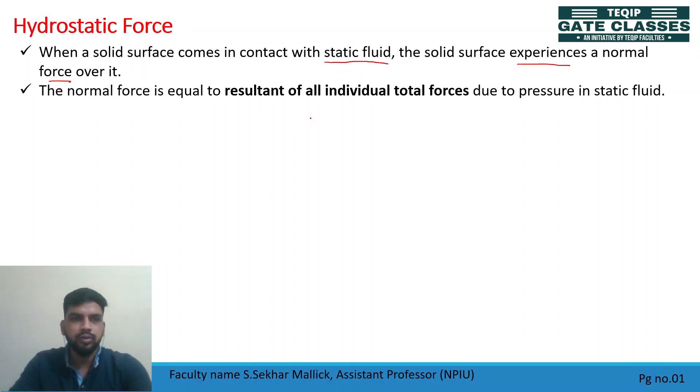This normal force is equal to the resultant of all individual total forces due to pressure in static fluid. This means whatever normal force acts in static fluid over the solid surface, that is equal to the resultant of all individual pressure forces. The total resultant of the pressure forces acting is your normal force, and that normal force we call as total pressure or hydrostatic force, right?

And the magnitude is equal to the resultant of all individual total force due to pressure. So now tell me, what is the location of hydrostatic force?

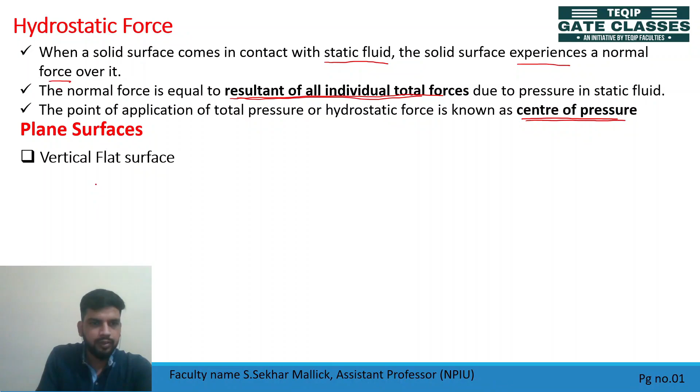Suppose here we have a flat surface that is vertical. This is just submerged in the fluid. This is your fluid surface, and let's take this total height as h, capital H.

And Cg of this vertical flat surface is here. Cg we denote by x bar. So x bar is the distance of Cg from the fluid surface. If I see this surface, this was the side view. For simplicity I am assuming this as a rectangular surface. This length, suppose this is your L.

Now let's consider a small elemental area of length dx. This small elemental length is dx. Then the area of this element will be dA equal to L into dx. Length is L and this height is dx, right?

Now tell me, what would be the pressure force acting on this element? How much pressure force will act? That pressure force dF, suppose small dF, will it be equal to pressure into small elemental area dA? And what is pressure here? Assume this small elemental area is at a distance x from the free surface. Then will it be equal to rho g into x?

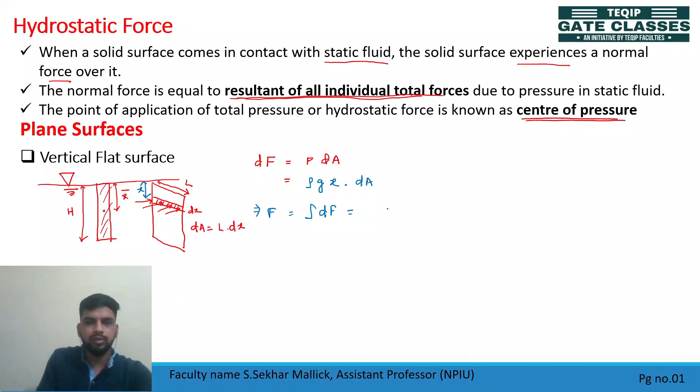So this is the force acting on a small element. If we want to get the total force, or the resultant of all individual forces, we have to integrate this. So total force F equal to integration of dF, isn't it? That is equal to integration of rho g x dA. Rho is constant for incompressible fluid and g is always constant, so can I take rho and g outside of this integration?

That leaves x into dA. What is integration of x into dA from mechanics? This is the first moment of area, isn't it? So integration of x into dA equals A into x bar. So in place of this, can I write A into x bar? So force, total pressure, or hydrostatic force becomes rho g A x bar. What is rho g?

Can I write rho g as omega or gamma? So rho g is also equal to omega, a, x bar. Some authors denote omega as gamma. So you can write that force equal to omega or gamma times a x bar. This is for a vertical flat surface.

Now tell me the location of this pressure force acting on this vertical surface. Weight acts at CG, and CG location is at x bar distance from the free surface. Now tell me, what is the location of this force? The location of center of pressure, we denote that as h bar.

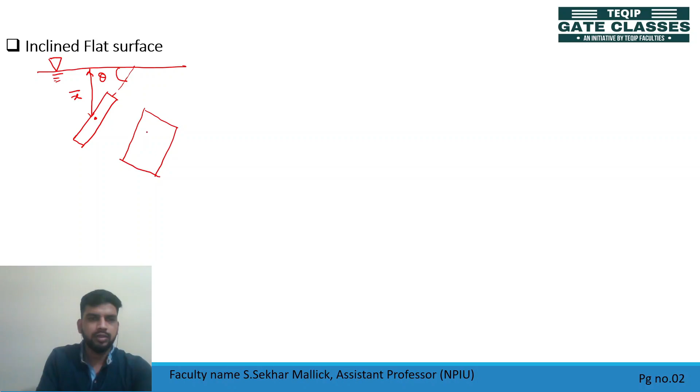Let's draw an inclined flat surface. Suppose this is your liquid free surface, and here you have a plate, a flat plate at an angle theta. Now let's assume this is the CG of the plate, and the distance between CG and free surface is x bar. Assume this plate as a rectangular surface, so its projection is this one: this length is L, this height is capital H.

Now tell me, force will be equal to how much? Total force, as we already discussed, will be equal to omega a x bar, but its center of pressure, the h bar value, will change. H bar will be equal to x bar plus Ig by a x bar, times sine square theta. So this h bar also depends on orientation - if the orientation changes, the value of h bar will change, isn't it?

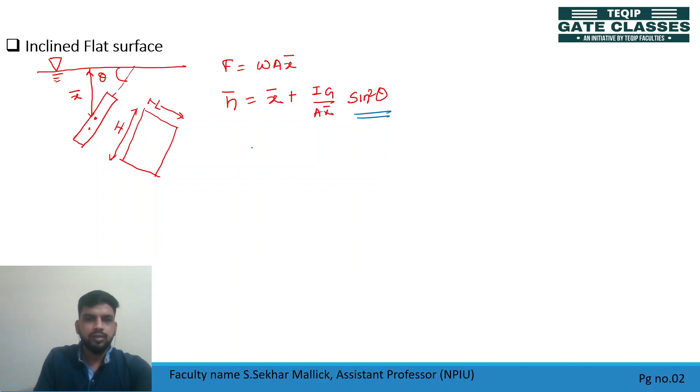Now, can you find this value for a horizontal surface? Suppose this is your horizontal surface, and the CG is at distance x bar from the free surface. Now tell me, what will be the value of total force, total pressure, or hydrostatic force? F equals omega a x bar. It will not depend on orientation.

Then h bar - tell me the location of center of pressure. For this case, can I write the angle theta as 0? If theta is 0, sine theta becomes sine 0, which is 0. So this term will be cancelled out, right? So h bar will become only x bar. H bar is only x bar, right? This is your pressure force acting on this horizontal plate.

So here pressure force will be small. Then with depth, there will definitely be an increase of pressure. So with depth, there will be increase of pressure.

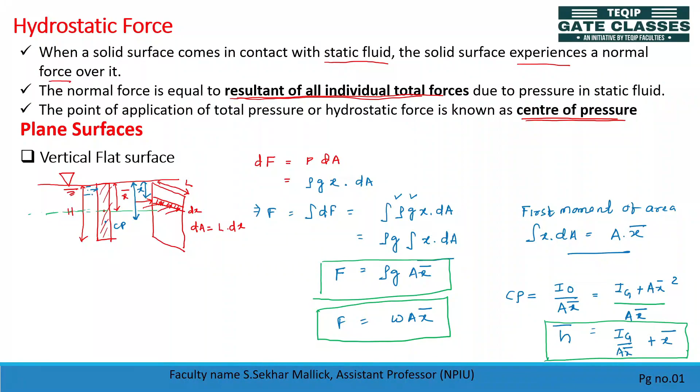Similar to the last figure, you can go and derive this. Here also, can I write that this pressure will be increasing with respect to depth? We know pressure increases with respect to depth. So it will come like this, like a triangle. So this pressure distribution is looking like a triangle.

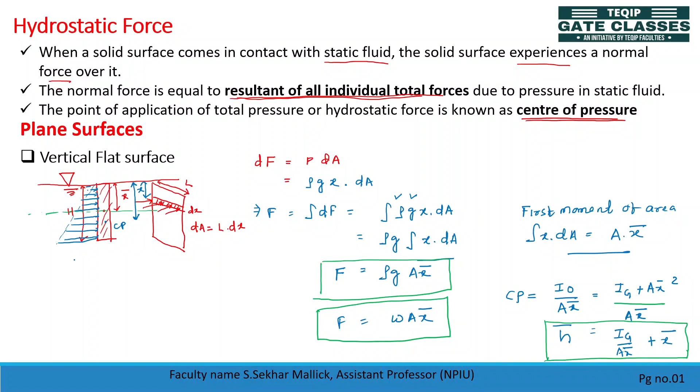And the center of pressure will be the centroid of this total area, right? Centroid of this total area is your center of pressure. So how much? If this is a triangle, you can find this value equals 2h by 3.

So this is for inclined flat surface and horizontal flat surface. Okay, now tell me one thing.

What is CG of this? CG of, suppose this is a triangle, and this is CG of the triangle, and this is your surface, bottom surface. If this is your y bar, what is y bar value? If I assume this height is h, what is y bar? Y bar equals h by 3.

Suppose if you have this semicircle, then for this semicircle, where will the CG be? CG will be at some distance. This is your y bar, right? Tell me y bar value here. If this radius is r, y bar equals how much? Y bar equals 4r by 3 pi.

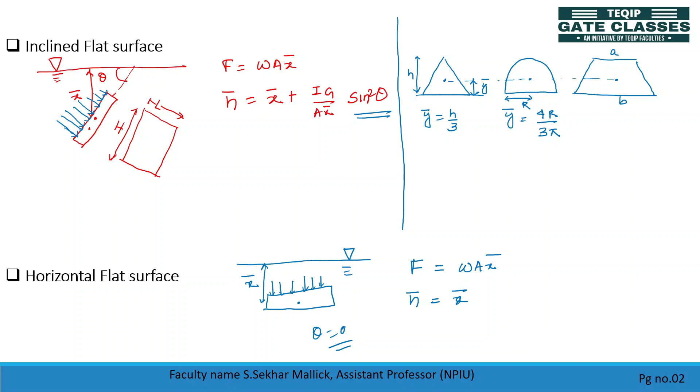Suppose we have a trapezium here. In case of trapezium, suppose this one is your y bar, this length is a, this length is b, and this height is h. Now tell me what is y bar? This one is y bar here. Y bar equals h by 3 into 2a plus b by a plus b.

Please remember, for a quadrant of a circle also, your y bar will be equal to 4r by 3 pi. You should know how to calculate CG.

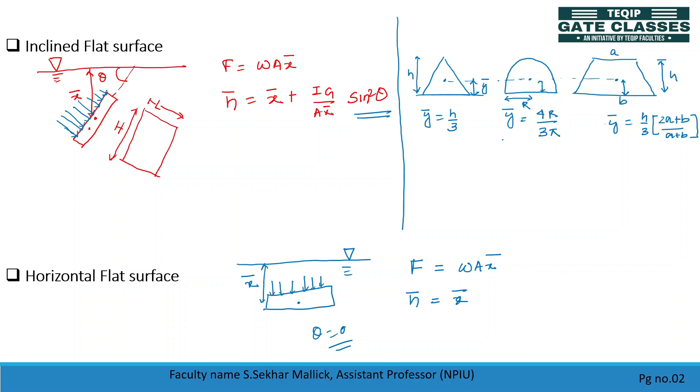Next, let's take some general cases. Case 1: suppose this is a rectangle here. The rectangle is just touched to your free surface, and suppose this height is

h. Okay, then now tell me what is y bar. This length, CG of this area is here, so we denote CG distance from free surface as x bar. What is x bar? X bar in this case will be equal to h by 2. And what is y bar?

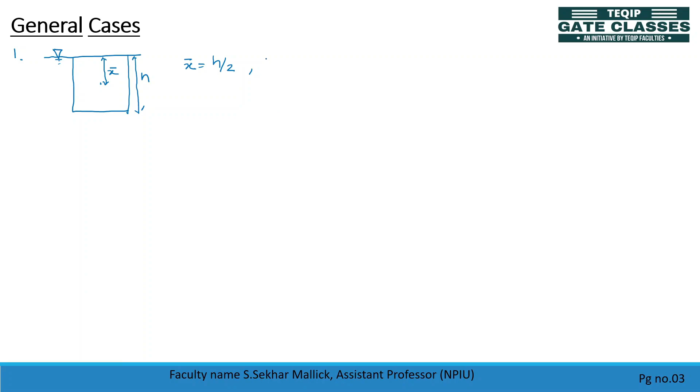What is h bar then? H bar equals x bar plus Ig by Ax bar. What is Ig? Ig is the moment of inertia about the centroidal axis. So Ig's value for a rectangular surface, what is Ig value? That is equal to bh cubed by 12.

Here this width is b. If this is b, then bh cubed by 12 divided by area. What is area of rectangle? B into h. Then what is x bar? Can I write x bar? X bar is how much?

H by 2. So can I write this in place of x bar: h by 2 plus bh cubed by... b gets cancelled, h square by 2, h cubed gets cancelled, so h by 6. H by 2 plus h by 6. The denominator will have 6. Then 3h plus h, so how much? 4h by 6, or can I write this as 2 by 3 h? So from this relation we found h bar equals 2 by 3 h for a rectangle.

Please put this in a box. Remember, directly you can memorize this: x bar equals h by 2 for this case, and h bar equals 2 by 3 h.

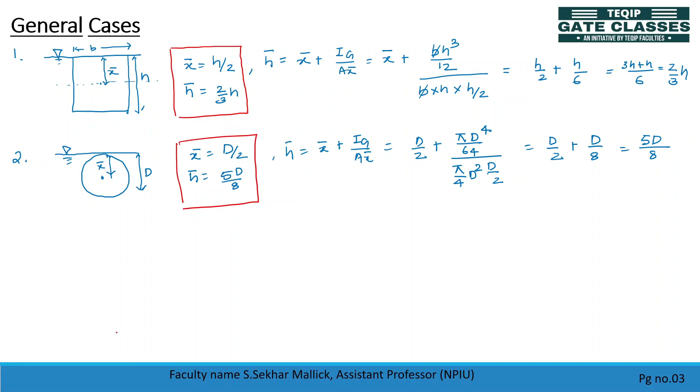H bar equal to 5d by 8. Memorize this x bar and h bar value for this case, so that it will take very less time in case they ask in exam.

Case number 3. Suppose you have a triangle here, just touching the free surface at the apex, and this is your h. Tell me how much this distance is. This distance is x bar. X bar value for a triangle, this is equal to 2 by 3h.

Okay, and what is y bar? Can I write x bar plus Ig by A x bar? What is Ig? Moment of inertia, centroidal moment of inertia, with respect to this centroid, that is bh cube by 36. Area is half bh, x bar is equal to 2 by 3h. So finally you got 2 by 3h plus this one, 2 gets cancelled, 36. So this is equal to h by 12, isn't it? Check this one, h by 12 is coming.

So in the denominator you'll have 12, 8h plus h, so equal to 9h by 12 or 3 by 4h. So can I write this? H bar equal to 3 by 4h. Please remember this, this will be very much helpful.

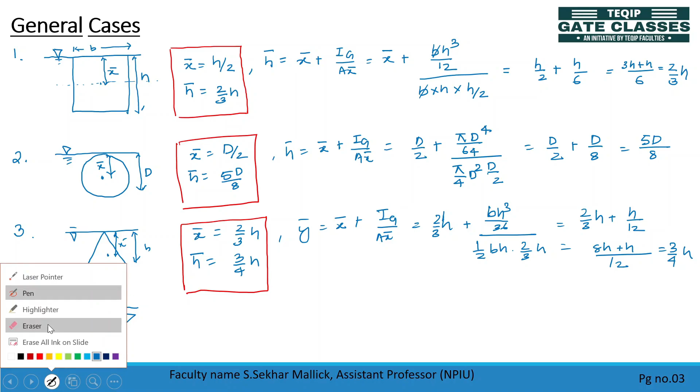Next is case 4, also a triangle, but its base is touching the free surface. Its base is this one, and the CG of this will be here. CG will be here, x bar. Total height is h. What is x bar here? In this case, x bar equal to h by 3.

Y bar equal to x bar plus, can I write this expression? So h by 3 plus I is how much? Similar to that, bh cube by 36, half bh, but this one is h by 3. Okay, so can I write this? H by 3, 6, so h by 6. So how much? 6, 3h, so h by 2. This is equal to h by 2. So in this relation, h bar becomes h by 2. Please put this in a box, it's very very important. Please remember all these cases.

Okay, in the next slide we will solve some numerical.

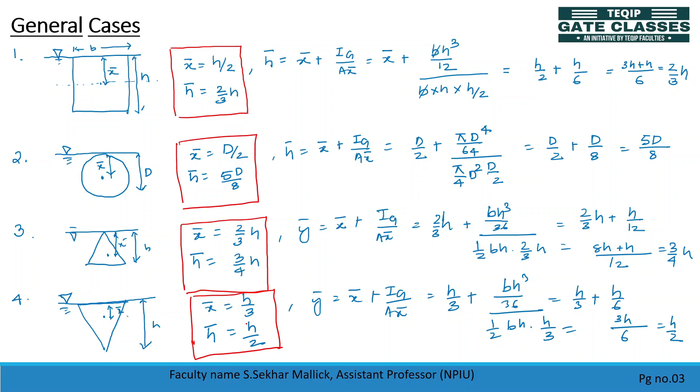Question number 1, let's check this. A tank with 4 equal vertical planes of width W and depth H is completely filled with liquid. If hydrostatic force on any vertical plane surface is equal to the force at the bottom, then find the ratio of H and W. So there is a tank whose width is W and depth is H.

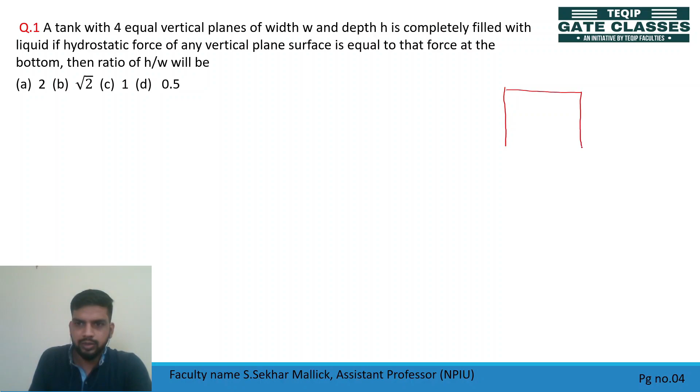Let's draw a tank here then. Okay, it's a tank with rectangular cross section. Let's join this. Okay, so this height is h and widths are w, right? So this is w, w, w, this one is w. Okay, so you have 4 vertical planes, 1, 2, this one 3.

Shall I pick one more color here? This is one vertical surface. Okay, this one is one vertical surface, okay, and back and front. So 4 vertical surfaces of depth h and width w. Okay, so what is given here? Check. Hydrostatic force of any vertical plane surface is equal to force at the bottom. Hydrostatic force of vertical plane surface is equal to hydrostatic force at the bottom. Okay, so this is your given data.

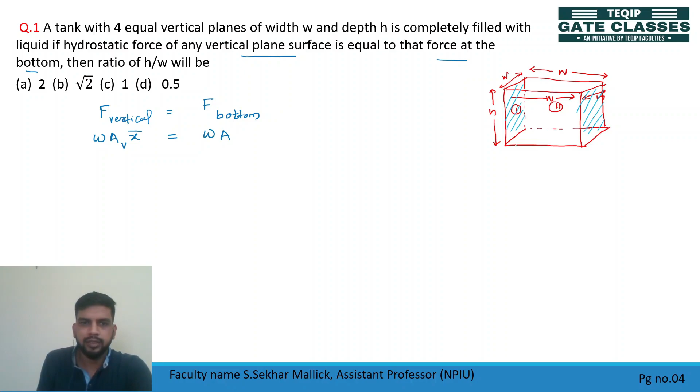Okay, so what is the vertical force or hydrostatic force on these vertical surfaces? Can you find hydrostatic force on vertical surfaces? Formula is omega A x bar. Omega, area of vertical, x bar is equal to force at bottom, means same omega, but area of this bottom plate, and x bar, this is x bar of this vertical plate and this is x bar of bottom plate. Now omega means what? Rho g. G is a constant and rho for this container, this tank, is same, so this one cancels out.

Okay, now what is the vertical area? Area of vertical surface is how much? H into W, and x bar of this vertical surface, x bar means Cg, distance of Cg from the surface. If it is completely filled from the surface, x bar will be, tell me, x bar value, h by 2, that is equal to area of this bottom plate.

Area of bottom plate is omega, this one is also omega, this one is also omega, so it's a square plate with area omega square into x bar. X bar means CG of this plate from surface. Distance between CG of this bottom plate from surface is how much? It is h, complete h.

So now omega got cancelled, h got cancelled. How much are you getting? So can I write h by 2 is equal to omega? So what is h by w? H by w is equal to 2. Which option is correct? Option A.

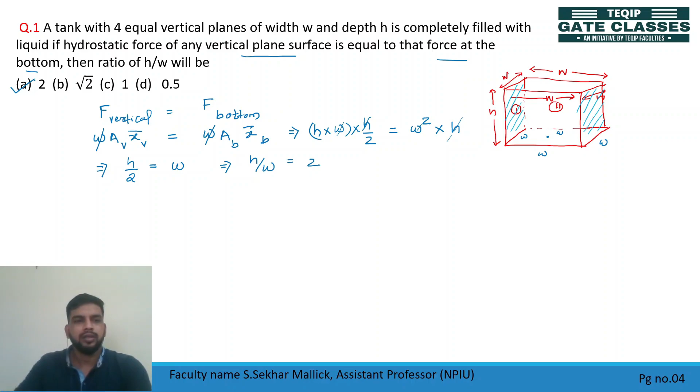Okay, let's see next question. Question number 2: a cylindrical tank of 2 meter diameter and 10 meter length is laid with its axis parallel to horizontal plane, and the cylinder is filled with water just to its top. What is the hydrostatic force on one of the end plates? So draw a cylindrical tank here, laid with its axis parallel to horizontal plane. This is your circular cross section, and it is completely filled with water up to the top.

Now tell me, what is the hydrostatic force on one of the end plates? There are two end plates, and on both end plates the hydrostatic force will be equal as their cross sections are equal. So find hydrostatic force on this circular plate. How to do it? I am giving you 10 seconds. Find out the answer of question number 2. Which option is correct?

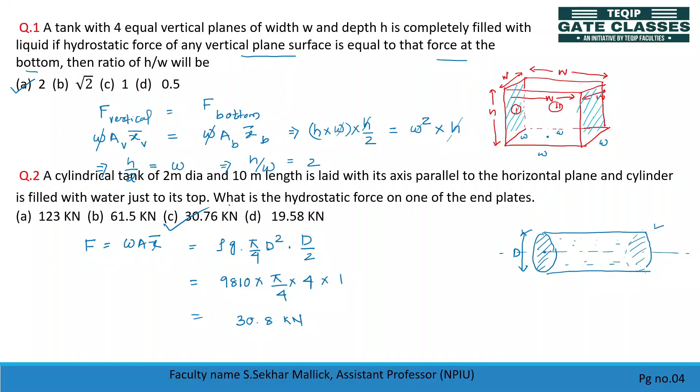Okay, now let's move to next question, number 3. In the situation shown in figure, the length BC is 3 meter, and G is the midpoint of BC. Point G is your midpoint of BC. Then hydrostatic force on BC is measured per unit width, g being the acceleration due to gravity. Okay, so this is your water surface, and here you have a plate BC.

Its CG is here. If this is the CG, distance of CG from the surface is x bar. Can you find x bar value here? We have to find this angle, right? The angle made by this inclined plate with vertical is 60 degrees. That is given already.

So x bar will be equal to how much then? 4 plus, if this is the midpoint, 1.5 cos 60 degree. So you can write x bar equal to 4 plus... what is cos 60 degree? Cos 60 is equal to half. So 0.75, giving 4.75 as your x bar.

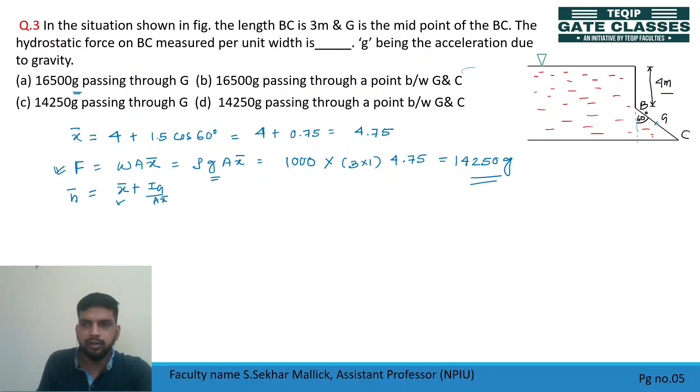With value 14250 G we have two options C and D, but now we have to locate this force position. The point of application of this force is your center of pressure, and center of pressure H bar equal to X bar plus Ig by A X bar. So this value will be higher than X bar. So point of application of force will be higher than X bar from surface to G, and center of pressure will lie below. So which option is correct from C and D? Option D, between G and C.

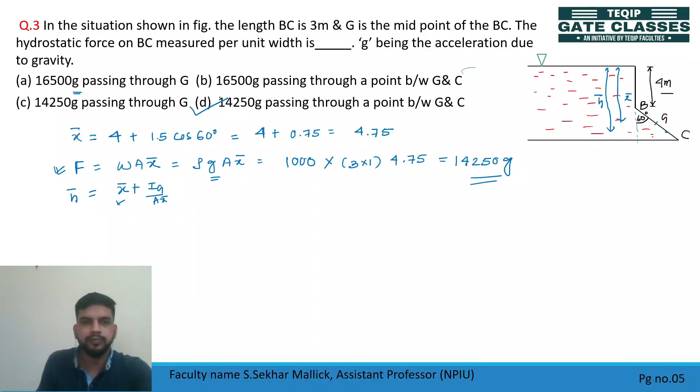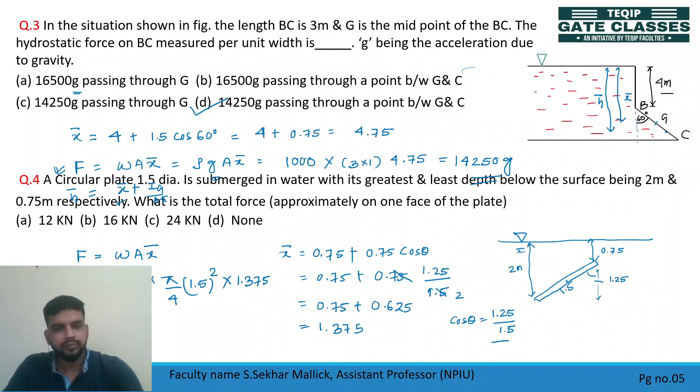Now tell me which option is correct. Just use your calculator. Which option is correct? Is it coming 23.8 kilonewton? Yes. So option C is your correct answer.

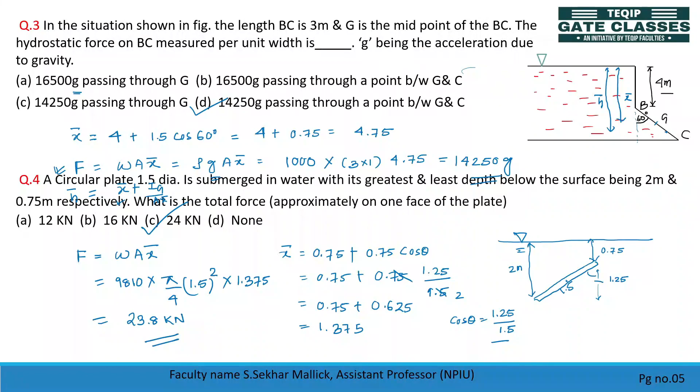Okay, let's solve one more numerical. Okay, so check question number 5. Figure shows a hydraulic gate PQR whose weight is very small compared to hydrostatic forces. Then find the value of H for equilibrium. Okay, so here you have a hydraulic gate P, Q and R.

PQ is vertical surface, QR is horizontal surface. Okay, so in vertical surface, the hydrostatic pressure at this surface, the pressure distribution looks like this, isn't it? So this is a vertical surface and this is a horizontal surface.

So in this vertical surface, can you find the direction of force? The resultant force will act in this direction, and in the horizontal surface, resultant force will act in this direction. This is your center of pressure. At the center of pressure, resultant of force will act, and here too at center of pressure, resultant of pressure will act. You know, for horizontal surface, both x bar and h bar are equal.

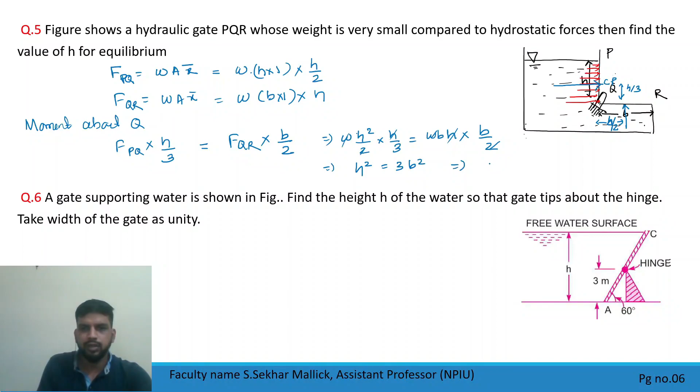So check this, put the formula omega h into h by 2, so h square by 2 into h by 3 is equal to force on QR, so omega bh into b by 2. Okay, h gets cancelled, 2 gets cancelled, omega gets cancelled, so now you have h square is equal to 3b square. So what is h value then? H equal to root over of 3b. Okay, this is your value of h for equilibrium of this gate PQR.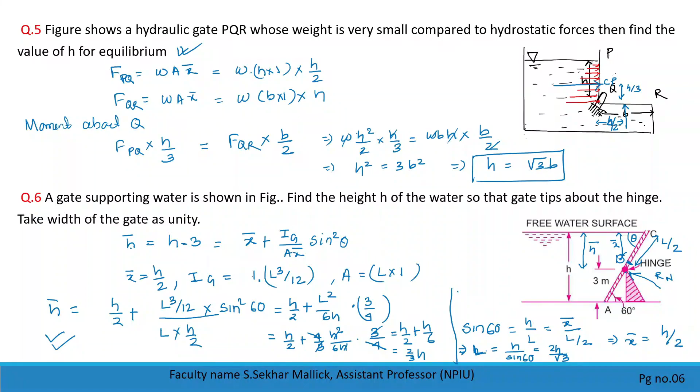Check this. In this expression, can I put H bar equal to 2 by 3H? So if I put H bar equal to 2 by 3H, what is H value? H bar equals 2 by 3H is equal to H minus 3. So from this relation, what is H value? H equal to H by 3 is equal to 3. So H is equal to 9. This is your final answer. H equal to 9 meters.